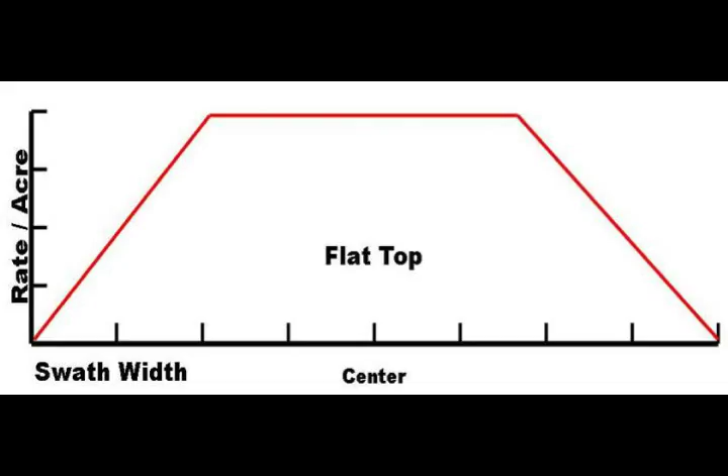How to correct your spread pattern. If your spread pattern is poor, you will have streaking as you apply your product. This will result in uneven growth and a poor harvest. Newton Crouch spreaders are designed to give the flat top or oval spread patterns. They can't produce a pyramid when properly set.

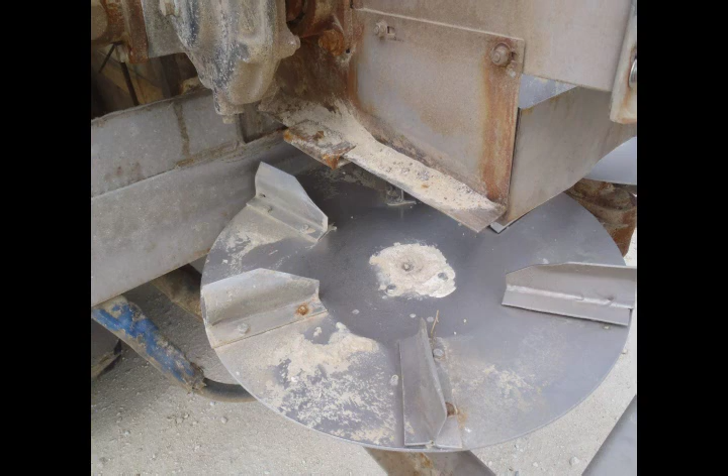There are several common problems that will cause a poor spread pattern. Poor material quality. Clumps will not spread evenly, or the material is too powdery to spread. Wet material will stick to the conveyor. Your chute should be clean both front and back of the guide, otherwise material does not pass through properly.

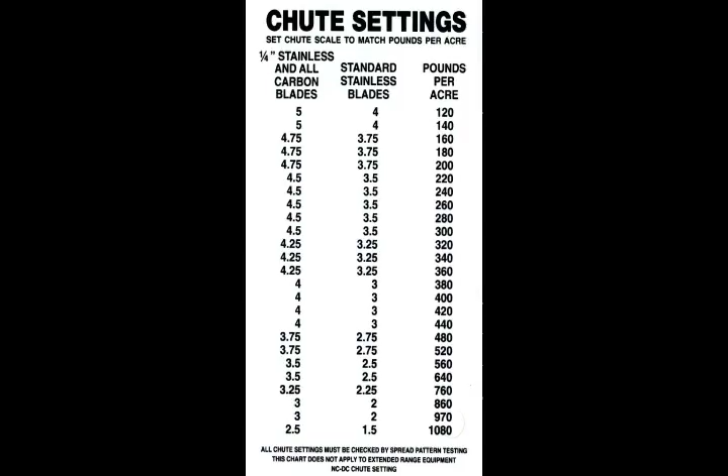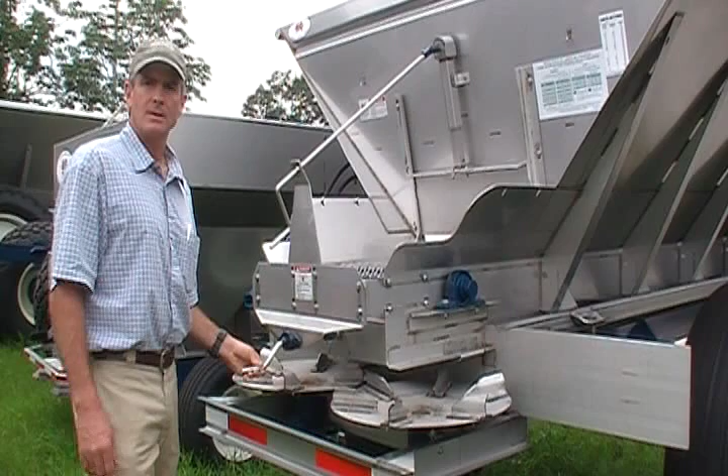Is your chute set for the correct dishes and blades? Check the decal on the rear of your unit. Know your type of blade. There are different settings for mild steel and stainless steel. There is a difference in the thickness of the blade. Chute adjustment is adjusted in the back of the spreader with the chute adjustment screw.

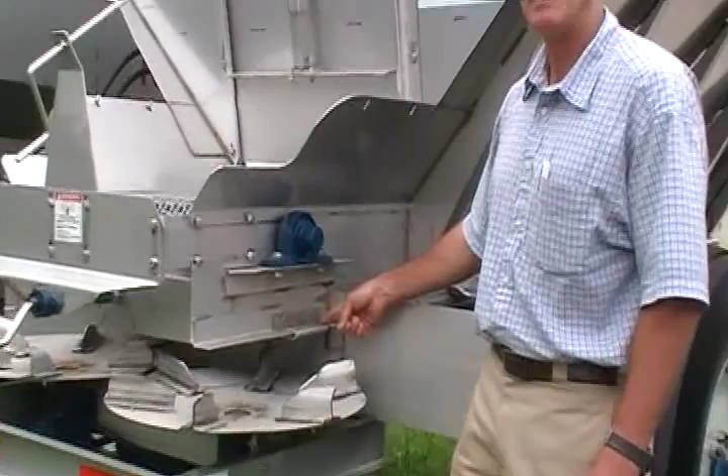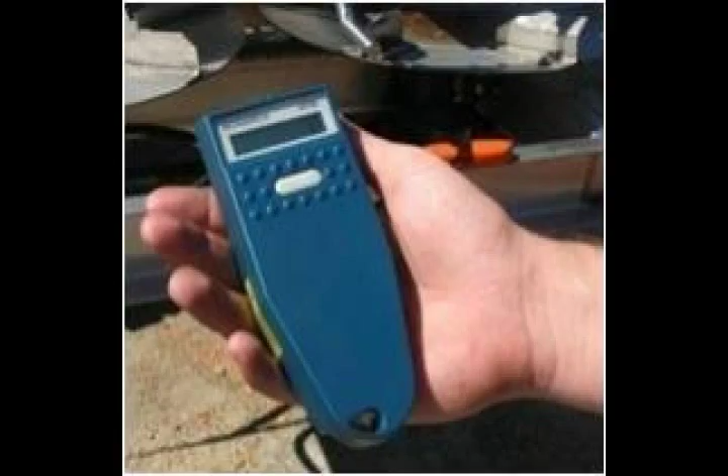The front edge of the guide should be lined up with a corresponding number on the chute scale. Check your chute divider. Is it bent or off-center? Is your spinner speed correct? Use the tachometer to verify the RPMs. If you do not have sufficient oil flow, your spreader will not operate properly.

You need to know your spinner speeds to accomplish the correct spread width. Correct spinner speed for 40 foot is 450, 50 foot 500 to 550, 60 foot is 650. And to be able to do that, you just put your piece of reflective tape on a part of the spinners that are spinning, so your tachometer can pick that reflective tape up.

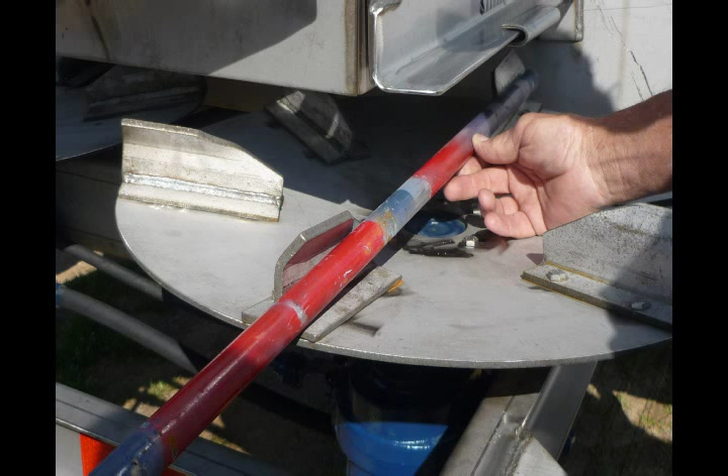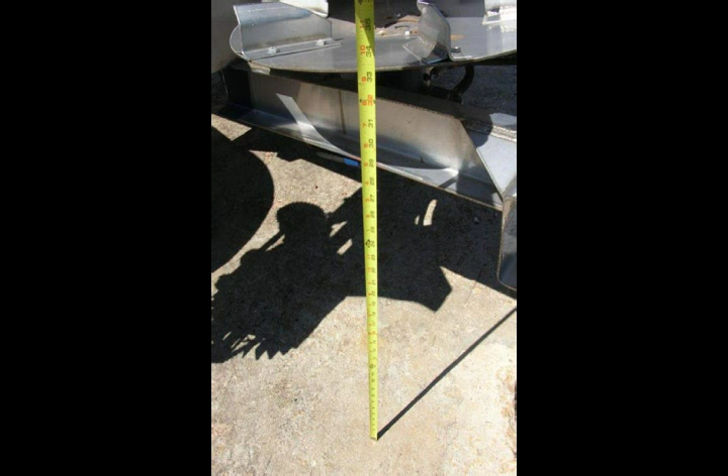Are your spinner dishes and blades installed correctly? The blades should line up across from each other. The dishes must be level. Dishes should measure 25 1/2 inches, center to center. If the dishes are not level, is the motor mount bent? Has your spreader been hit in the rear or backed into something?

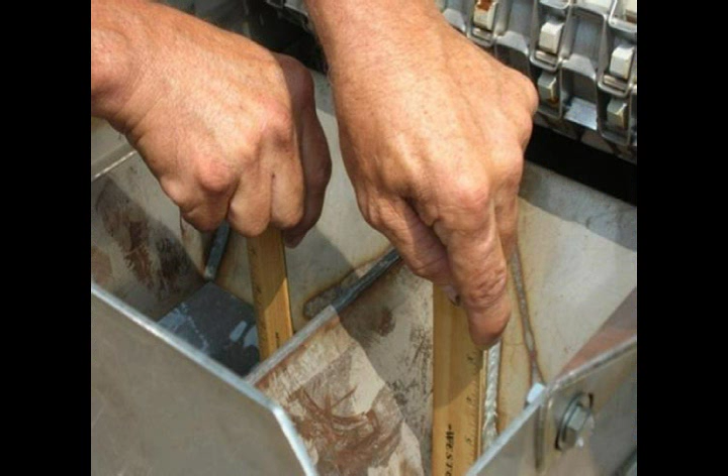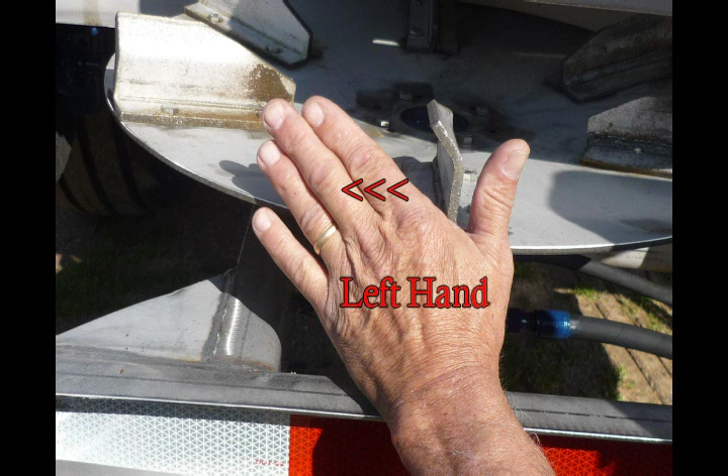Are your dishes centered under the chute? Using 2 rulers, reach down through the chute and verify the tips of the rulers are equal distance from the edge of the dishes. Dishes must turn in the correct rotation. Left turns clockwise, right turns counterclockwise. Check the direction your blades face. You must use Newton Crouch blades on Newton Crouch equipment. You must use the correct blades on the correct dish. Never mix stainless steel and mild steel components.

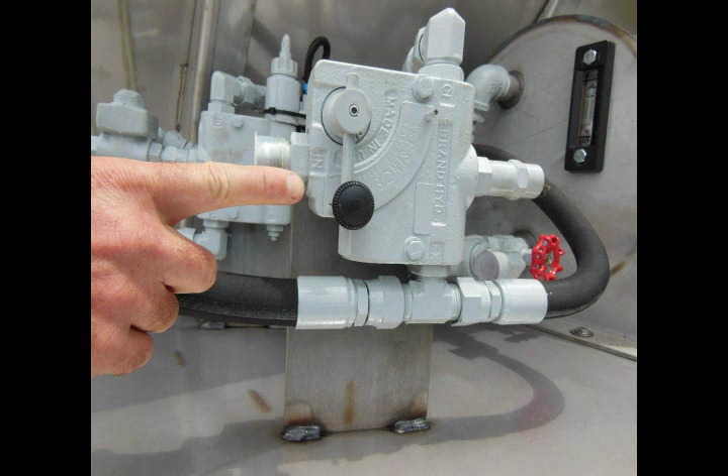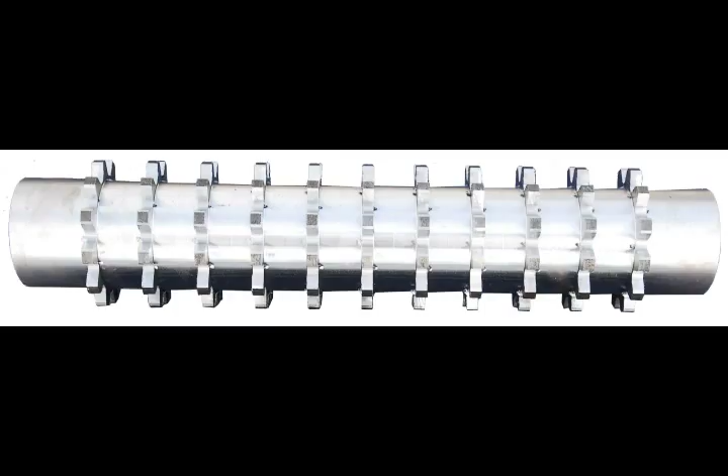Check your hydraulic components. On your tractor, check your pump. And your tractor RPMs must be within the operation window of your spreader. On your spreader, check flow control valves, pressure relief valves, and wheel control. Rear roller wear or change. The cover plate must match the rear roller. If you have changed your rear roller, make sure the rear roller cover plate is aligned correctly, as the teeth of the roller must cleanly rotate through the cover plate.

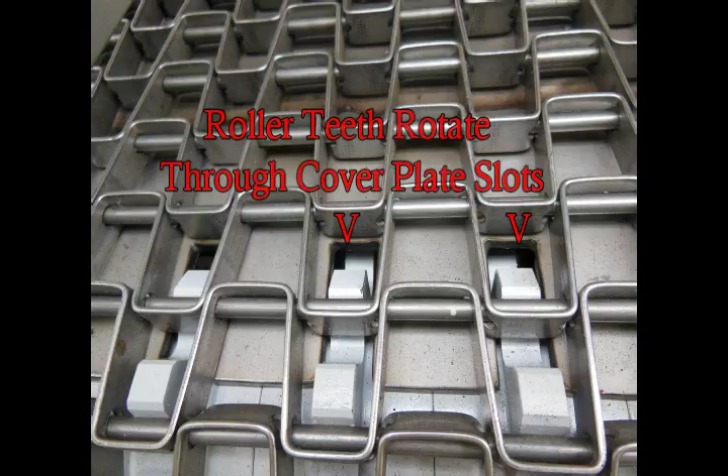The operator must drive consistently. Do not change gears, jerk, or weave the machinery over the pans. Do not run over the pans.

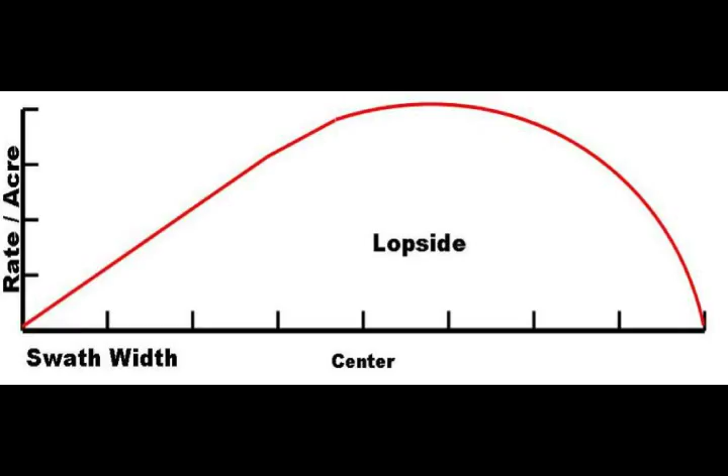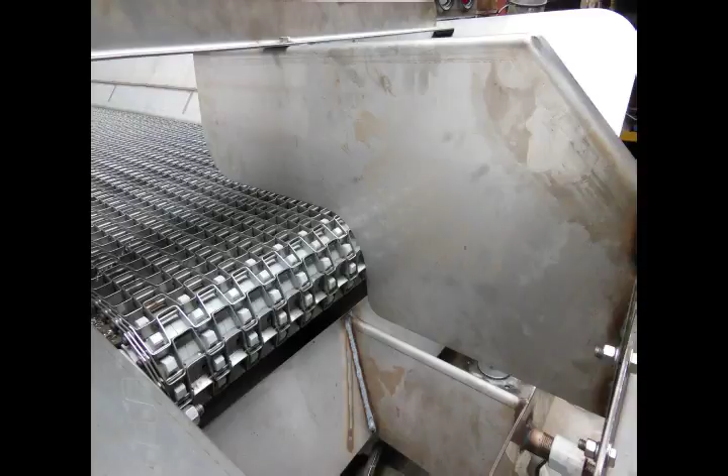Undesirable spread patterns. The lopsided left or right pattern may result if there is more product directing to one side or the other to your spinner dishes. Operating on slopes without an effective material divider may cause the product to shift downhill and empty faster into one or the other dish. To correct this pattern, make sure your material divider is centered in the bed chain.

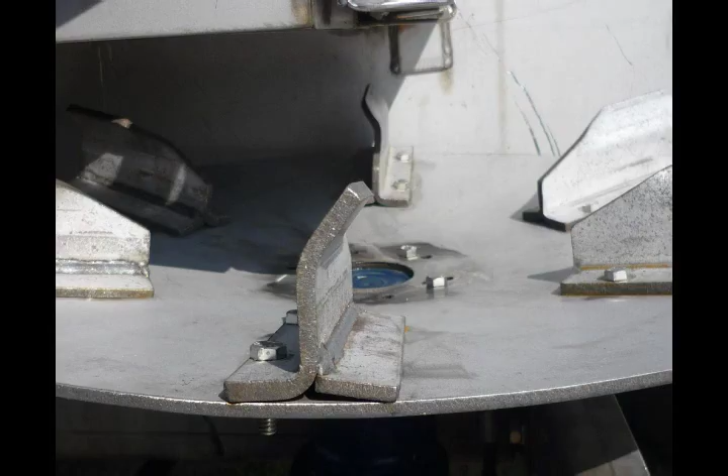Move the chute in toward the spreader body, lowering the number. Decrease the spinner speed. Move a pair of spinner blades in opposite direction of spinner rotation. Make only one adjustment at a time.

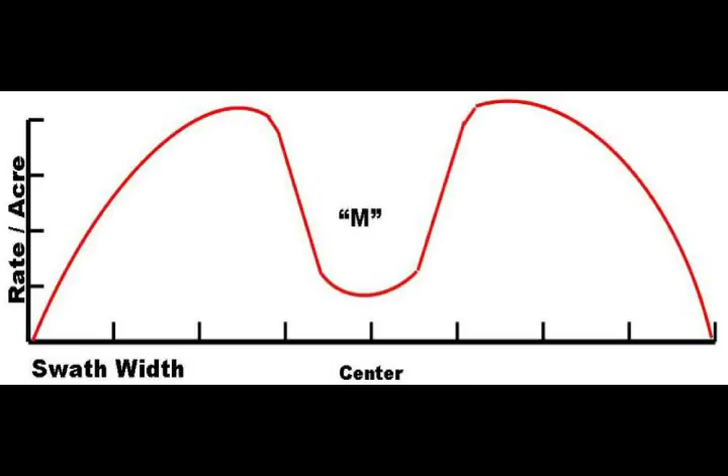Improve the M pattern by moving the chute in toward the spreader body, lowering the number. Decrease the spinner speed. Move a pair of spinner blades in opposite direction of spinner rotation. Make only one adjustment at a time.

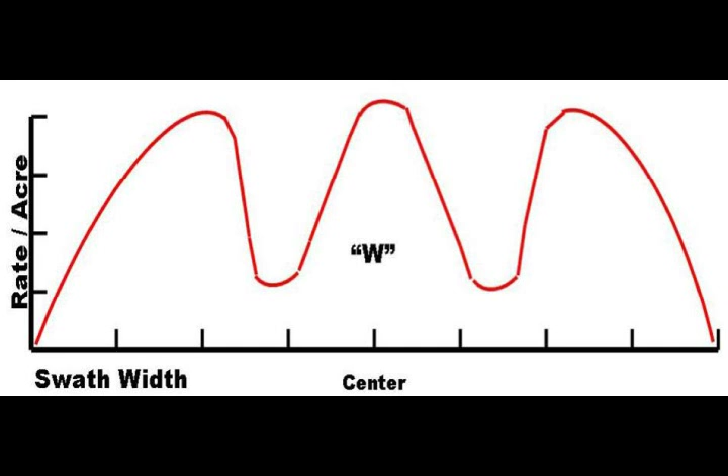The W pattern is caused when a heavy band of product is applied in the center in addition to the bumps on the left and right. Heavy application in the center may be due to an improperly adjusted chute or material divider. Check these first. Check for leaks in the floor of the hopper, which may permit the material to fall directly on the ground rather than on the spinners.

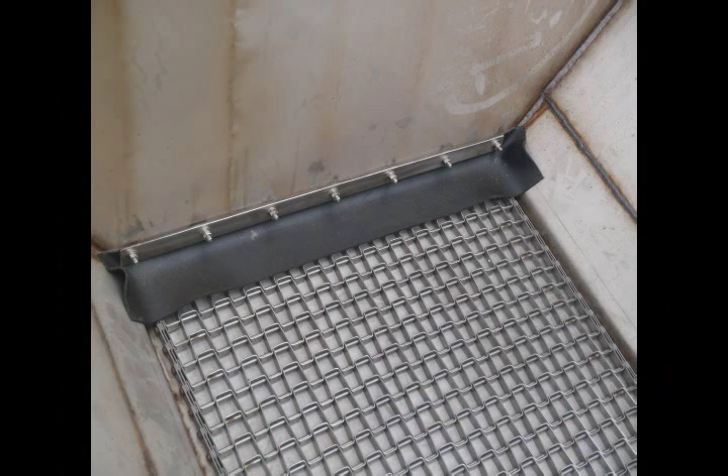Check the front flap inside your hopper. If it is worn or damaged, it may allow fertilizer to fall out the front of the hopper. Move the chute in toward the spreader body, lowering the number. Decrease the spinner speed. Move a pair of spinner blades in opposite direction of spinner rotation. Make only one adjustment at a time.

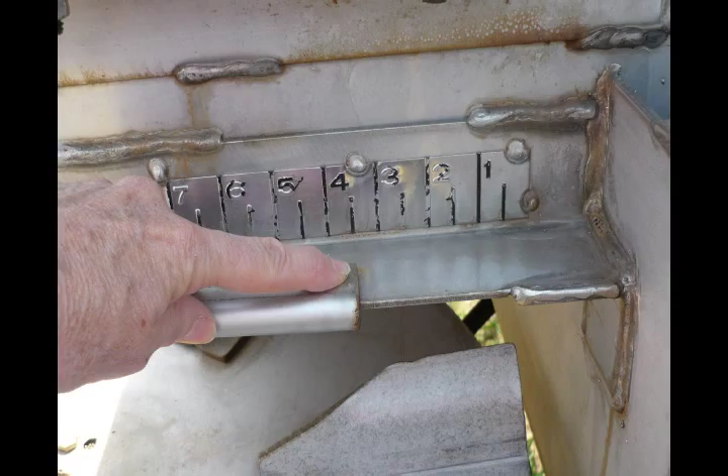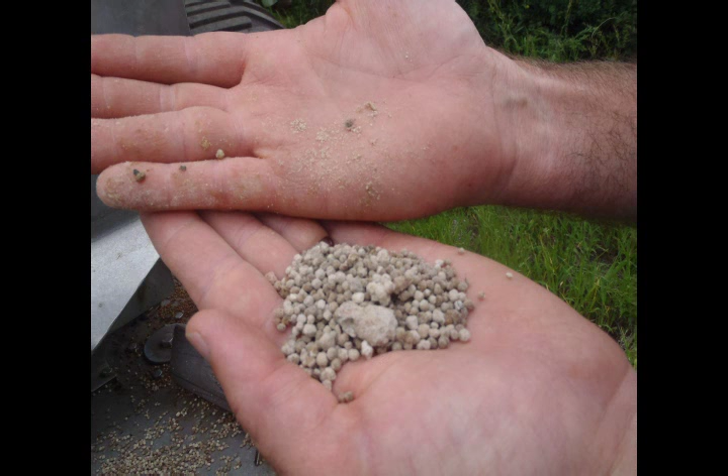There are a few generalities that may help you fine-tune any spread pattern. As the chute is moved out from the spreader body, product is taken from the center of the pattern and placed more to the outside of the pattern. An increase in spinner speed will take more of the product from the center of the pattern and place it more to the outside. Excessive RPMs will cause the product to be thrown up into the air or beaten into dust.

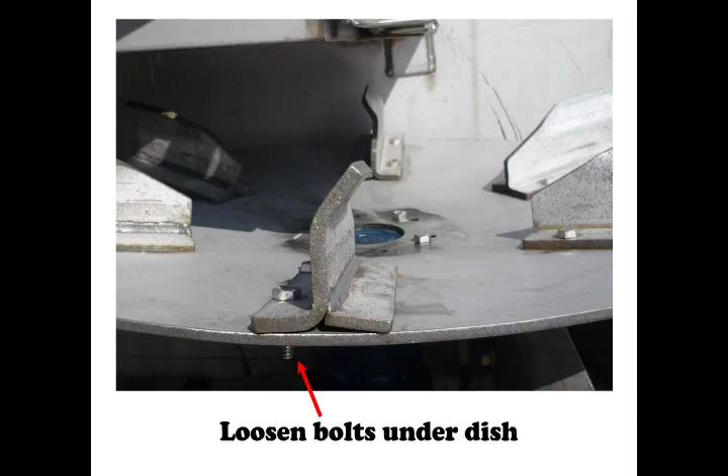Advancing the outer tip of the spinner blade in the direction of rotation will take some of the product from the center and move it to the outside of the pattern. Make only one adjustment at a time.

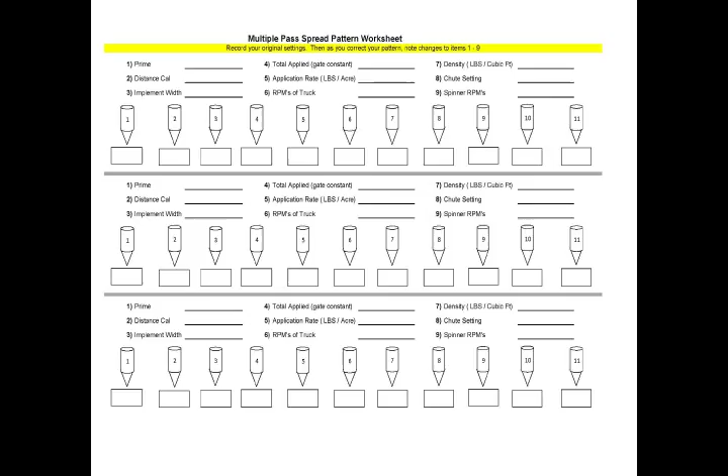Keeping good records not only saves you time, it increases your accuracy. Newton Crouch developed several worksheets to help us approach pattern improvement in a precise, methodical way. The Spread Pattern Worksheet tracks all the variables we have discussed for multiple runs as you improve your spread pattern. The Multiple Pass Worksheet tracks each tube in your test pattern over multiple runs. You can see immediately if you are doing the right thing. And once you have the desired pattern, save those results. The Spread Pattern Documentation Worksheet lets you compile the information from your best run and save it for future use.

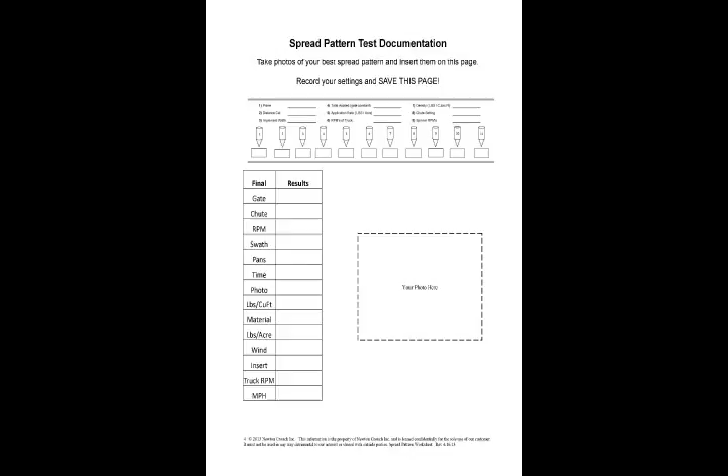This completes our series on how to spread pattern test your dry fertilizer spreader.